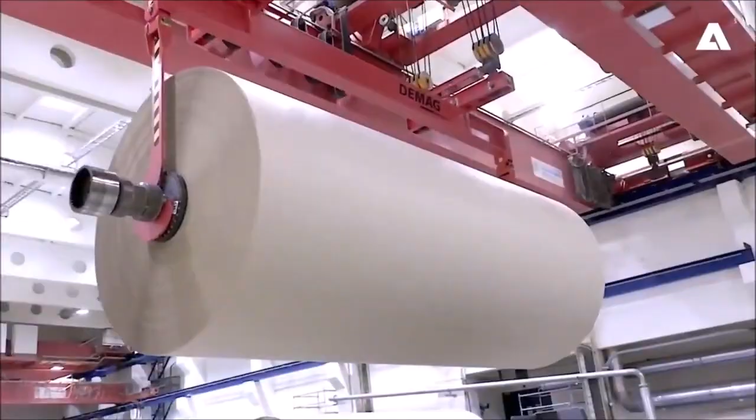We at ANDRITZ Paper and Board drive your success through cost-efficient innovations, and we form sustainable relationships. From stock preparation to the reel, including fabrics and rolls, automation, pumps and services, we deliver solutions for complete lines.

We are experts in rebuilds and conversions, including project management, engineering, auxiliaries, electrification and control systems, startup assistance, training and after-sales service. Our mission is to create value in two ways: by improving the value of your mill's production operations and by adding value in the way we work together with you.

Our service specialists help protect and extend the life of your equipment from virtually any OEM and lower your overall operating costs. Let's foresee digitally with Metris. Risk-based management, remote assistance and real-time support are only some of the key benefits. In addition, we offer innovative traditional automation solution packages such as hardware-independent control systems.

Cost-efficient innovations for paper and board production. Our customers worldwide rely on us. Expertise, know-how and innovation. This is what we at ANDRITZ Paper and Board stand for.

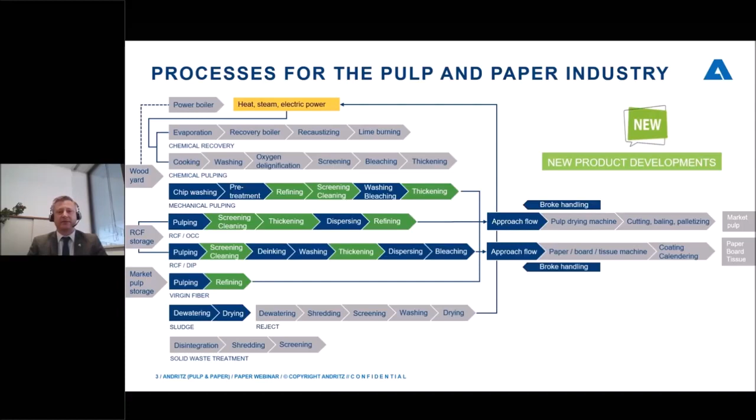I'm here to give a short presentation about the latest developments in fiber preparation. My presentation is divided into 6 parts and I will start with a short overview. As you might know, ANDRITZ covers the complete process for the pulp and paper industry. Today I want to focus on the newest product developments related to mechanical pulping, recycling fiber and virgin fiber applications. My plan for the next couple of minutes is to introduce the latest prime technology for screening, thickening, cleaning and refining applications.

Let us start with some details concerning the new Prime Screen X. The main parts I want to introduce are the top feed system, the prime rotor and foils, and the optimized basket's height-to-diameter ratio. These features lead to minimized wear, increased efficiency, and lower power consumption.

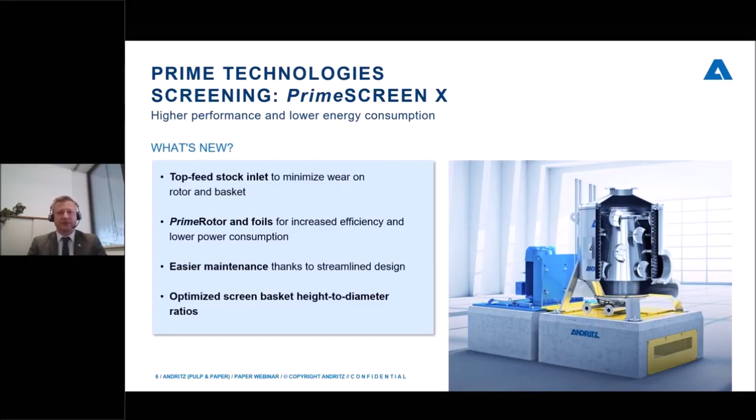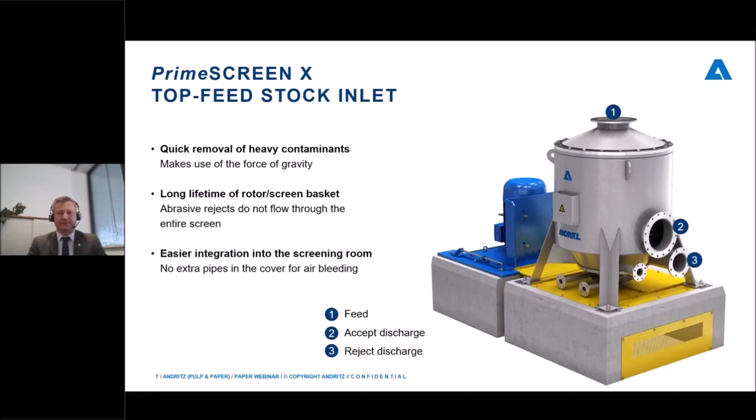The pulp suspension is fed under pressure to the top part of the screen. Due to this design, we can achieve a quick removal of heavy contaminants and longer lifetime of the rotor and the basket. As well, there is no need for any additional deaeration pipes anymore. In addition, the streamlined rotor attachment and the clamped screen basket design reduces the maintenance and replacement work compared with conventional pressure screens.

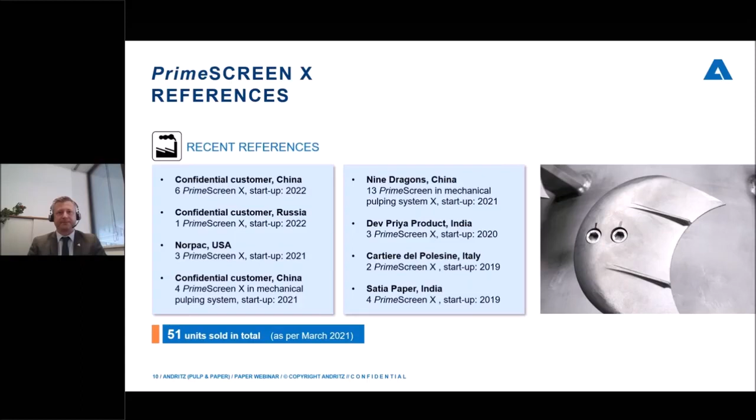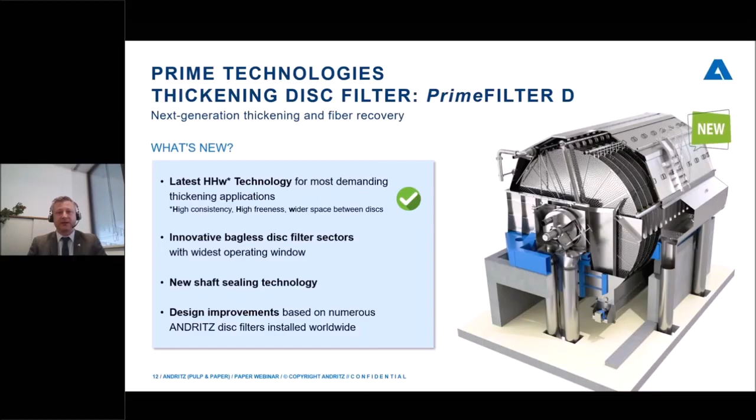The next ANDRITZ generation of thickener and fiber recovery filters will be the Prime Filter D. Within this filter, we have combined our latest high consistency and high freeness technology, as well as our innovative bagless disc filter sectors. This filter perfectly suits all kinds of thickening and fiber recovery applications for recycled fiber, virgin fiber, and mechanical pulp applications. For thickening applications, it goes under the product name Prime Filter DT, DS for Save All applications.

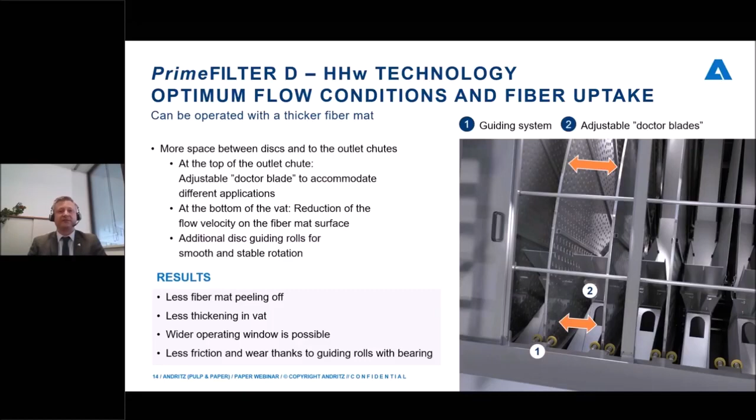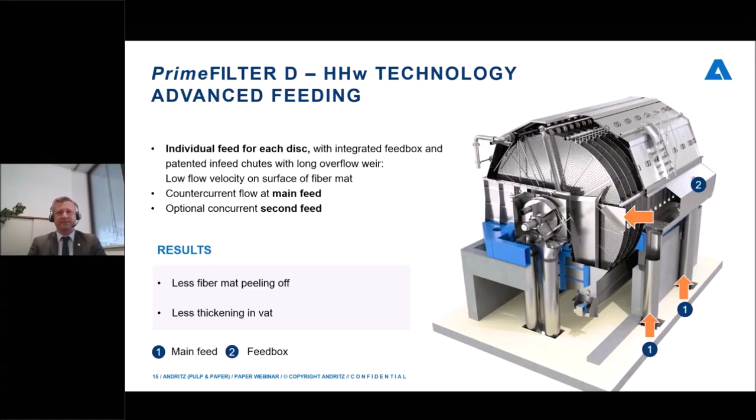Using the already mentioned HHw technology and the wider distance between the discs and the outlet chutes, this filter can be operated with a thicker fiber mat than usually. Due to the features mentioned before and the individual feed for each disc, we can assure less fiber mat peeling off and less thickening in the vat. The bagless sector design combined with the HHw technology has a 5% increased disc area. Furthermore, no additional filter bags are needed anymore.

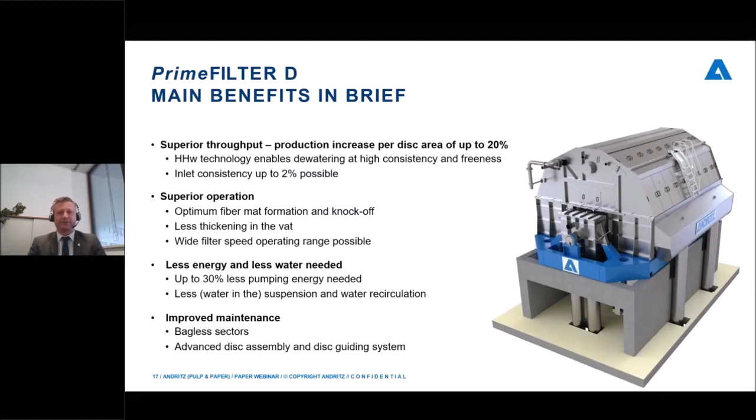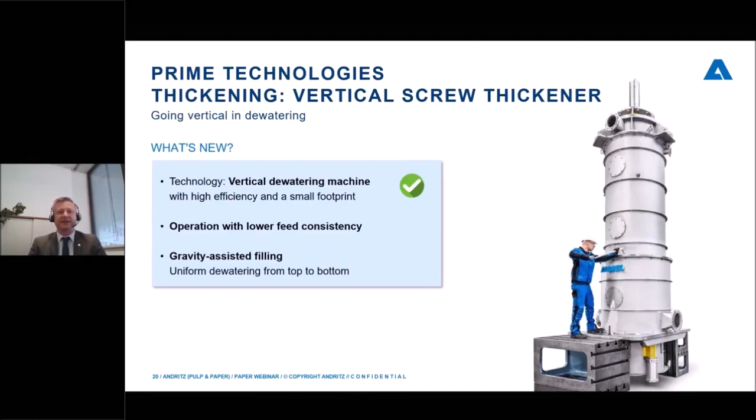The vertical screw thickener, simply described, is a vertical configuration of our well-proven horizontal screw press technology. This allows the equipment to run at lower feed consistency. In addition, the filling is assisted by gravity. The overall machine concept ensures complete filled screw flights and provides additional dewatering forces. We achieve a very even dewatering due to maximized dewatering area and dewatering forces.

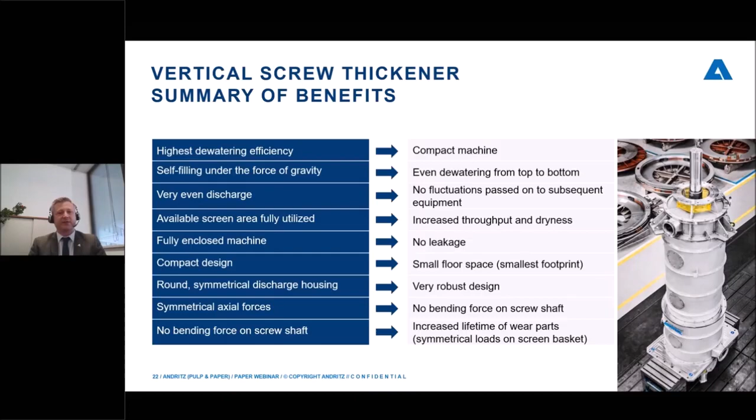Summarized, even at low feed consistency, a high outlet consistency can be achieved, considering equipment with a compact machine design and a very small footprint. Also, this is one of our latest innovations. We have already sold 7 units in total.

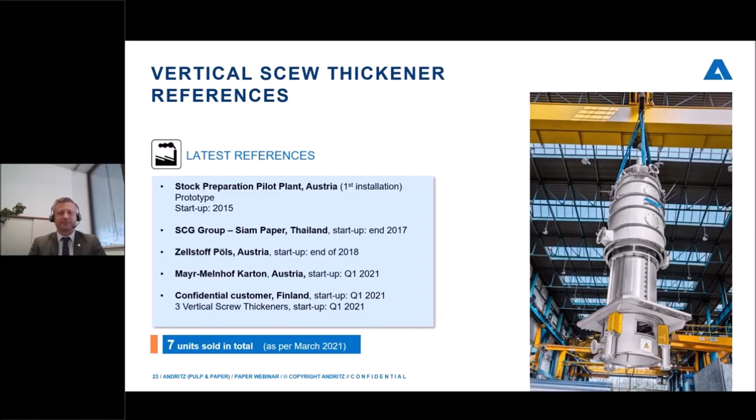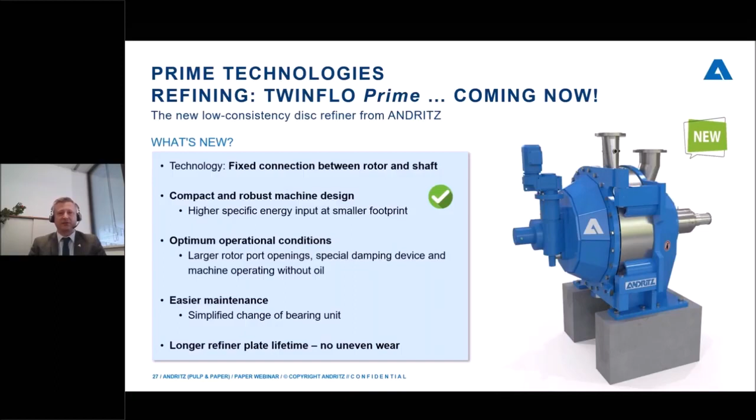Last but not least, I'm very happy to inform you that by today, ANDRITZ has released a completely new product: the TwinFlo Prime. This new low consistency refiner features a compact design, optimum operation conditions, and easier maintenance. Let's have a look at the following video to introduce the brand new TwinFlo Prime.

Welcome everyone. My name is Thomas Reisinger, and I am the Director of Mechanical Design for fiber preparation products in the ANDRITZ Paper, Fiber and Recycling division. Today, I would like to introduce a brand new development in the low consistency refining sector. Here we are in the M4 production shop at our manufacturing location in Graz, also the site of the ANDRITZ Group's head office.

My colleague Nick Heckfish is responsible for the assembly of LC refiners and has prepared this new model so that I can tell you all about the technological innovations, the background and the advantages of this brand new development. Behind me is not only my personal pride and joy, but also the pride and joy of the ANDRITZ development team, our new TwinFlo Prime Disc Refiner.

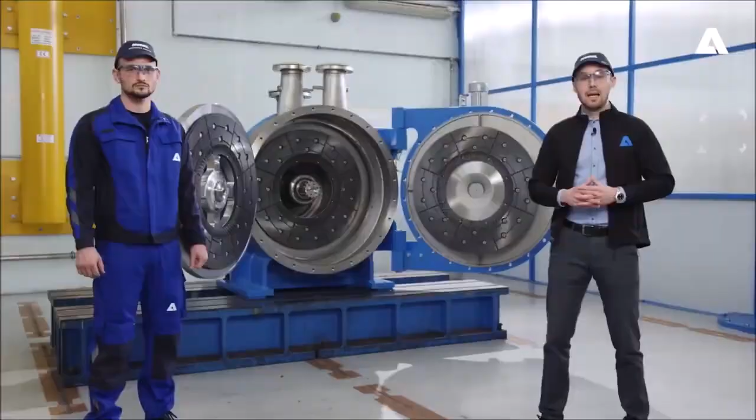So, let's get down to business. ANDRITZ has been involved in fiber preparation for many years now, and we have already started up more than 2,000 LC refining plants successfully all over the world. That's why we definitely wanted to stick with the basic principles of the TwinFlo refiner. By this, I mean a disc refiner with 2 refining zones, a cantilevered refiner shaft and diverse refiner plate designs in order to accommodate the different pulp properties to the best advantage.

What distinguishes the TwinFlo Prime from previous refiner models? In a nutshell, concentrated performance in a very compact design. In other words, the new TwinFlo Prime enhances the energy input, improves maintenance, and increases refiner plate lifetime. How do we do this? I'll show you this directly at the new TwinFlo Prime.

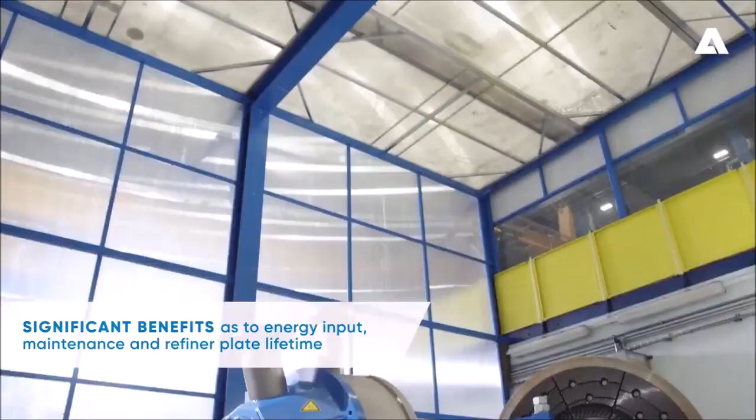We can now see the TwinFlo Prime in the open position. The first impression of the machine shows right away that the overall length has been reduced significantly. The inlet and outlet pipes are in the usual places, but the process area of the machine has been optimized in terms of fluid dynamics.

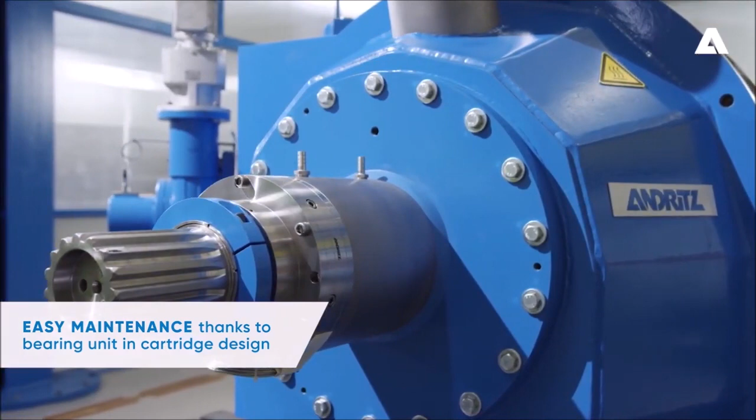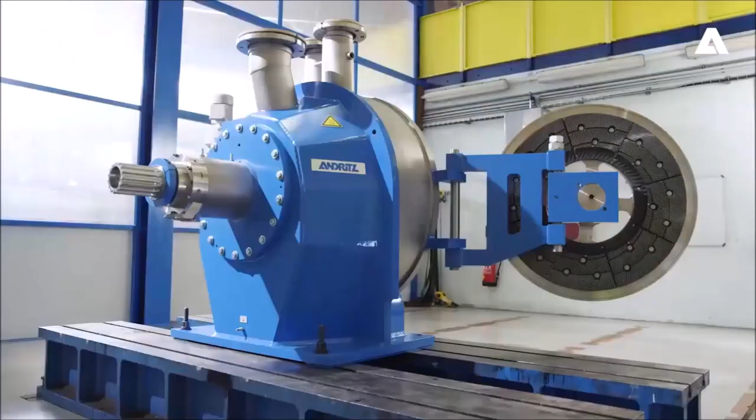The bearing unit of the TwinFlo Prime has a cartridge design and enables easy maintenance in this area. In this case, the rotating unit can be changed, complete with bearings and seals, without having to lift the TwinFlo Prime or its drive unit out of the foundations. In the standard model, the TwinFlo Prime comes with a mechanical seal, and this also has a cartridge design. The rapid changing system for the refiner plates in the TwinFlo Prime is the system that is well known from previous Twin Flow refiners.

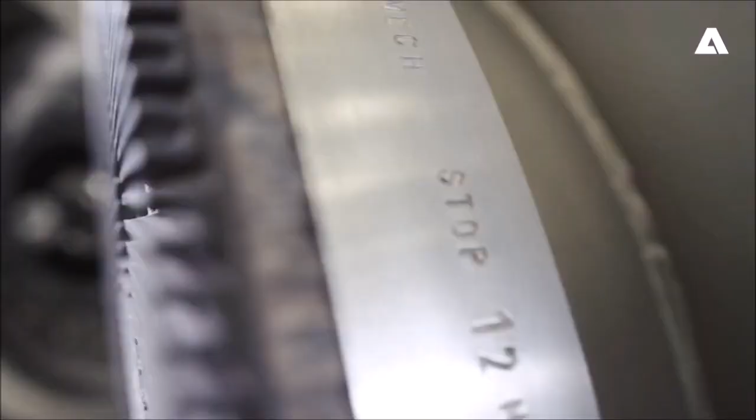In order to adjust the refiner gap of the TwinFlo Prime, one stator refining disc is adjusted, one remains in place, and the rotor refining disc with refiner plates on either side adjusts itself automatically so as to be axially centered between the two stator refining discs, a principle that we already know from previous Twin Flow refiners. Nevertheless, there is a significant innovation here. It is the way in which the rotor refining disc aligns itself centrally between the two stator refining discs.

So far, the rotor refining disc in the TwinFlo refiner was able to float freely in axial direction on the fixed refiner shaft, on a sliding hub, in the machine's process area. In the TwinFlo Prime refiner, the rotor refining disc has a fixed connection to the refiner shaft, and both components move together in axial direction. Axial position compensation between the fixed drive unit and the moving refiner shaft takes place in the coupling between the two units. As a result, there is no longer anything to impede axial movement by the rotor refining disc.

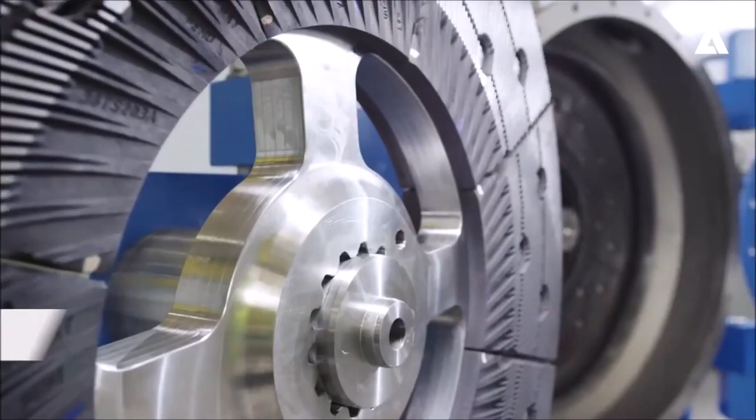Furthermore, the port openings in the rotor refining disc have been enlarged by 70% in the TwinFlo Prime compared to previous Twin Flow models. This improves the flow to the two refining zones, evens out the input of refining energy to the two refining zones, and prevents one-sided wear on the refiner plates. No uneven wear on refiner plates. Refiner experts know this is one of the keys to longer plate lifetime.

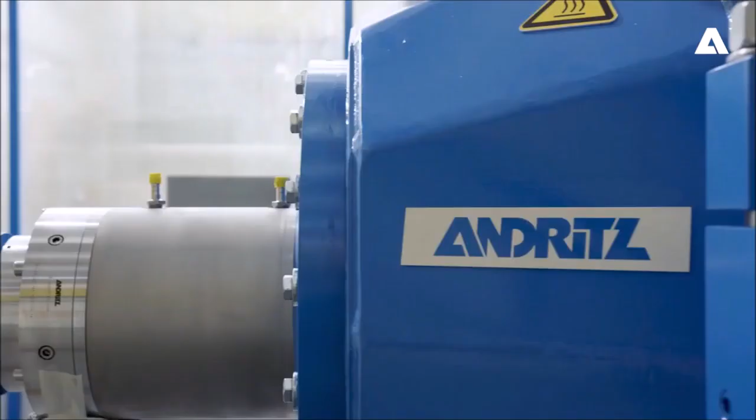And now, how do we manage to build such a compact TwinFlo refiner? How can we ensure that the rotor refining disc, including the refiner shaft, can float freely in axial direction? Two questions, one answer. A hydrodynamic, water-lubricated plain bearing. In this fascinating bearing technology, the shaft is supported on a thin film of water. By using this bearing technology, which has been known for a long time in turbine engineering, we can gain numerous benefits in the TwinFlo Prime.

For example, we can reduce the overall length of the TwinFlo Prime by 30% compared to previous Twin Flow models. This increases the machine stiffness significantly. As a result, we can achieve 25% more energy input. Furthermore, the TwinFlo Prime refiner operates without oil. The sealing water that is always needed serves at the same time as working fluid for the bearing. Another innovation in the TwinFlo Prime refiner is the viscous damping unit. It reliably prevents abrupt movements by the rotor refining disc and also operates with water.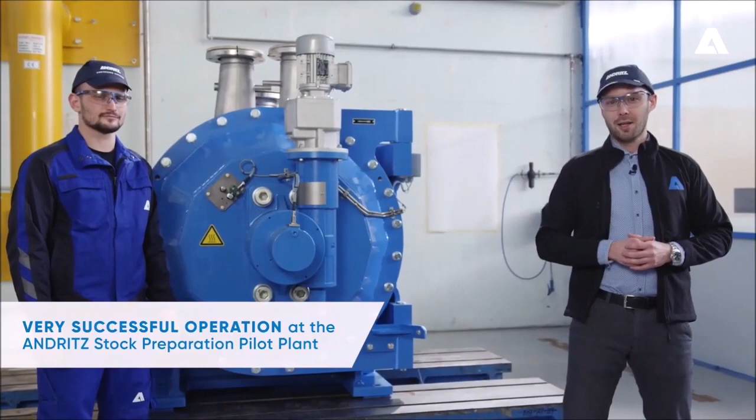I'm sure you want to know what operating results the Twin Flow Prime can achieve in practice. Since November 2019, the 20-inch Twin Flow Prime has been operating successfully in the ANDRITZ stock preparation pilot plant, and it was able to fully meet the high expectations placed on it. Now we have reached the end of our product presentation. I hope I have succeeded in providing you with a good picture of our new and innovative Twin Flow Prime.

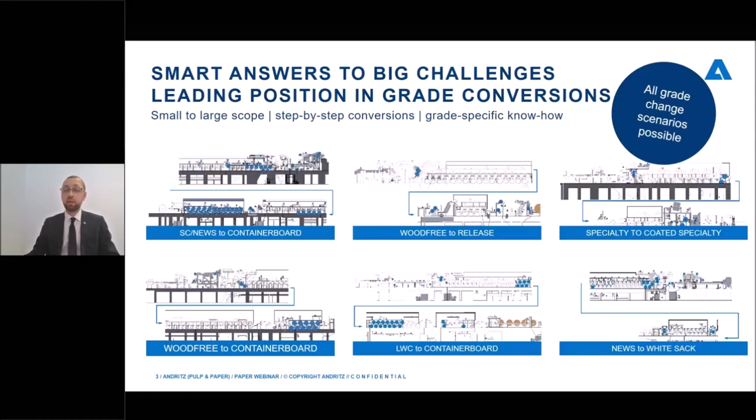Of course, all of this is possible today, but out of these jobs and this experience, we learned that sometimes there is a possibility to really deliver a big impact with rather limited effort, cost, and time. And today we will present you these parts. So basically, we will focus today on the headbox area, the forming section area, the rebuild of the press section area, and drying and finishing. And we will try to present in a short time what could really be the smart answers and what partial things you could do in a rather quick time to improve the situation.

First part, I have some problem with the presentation. I hope it will be solved.

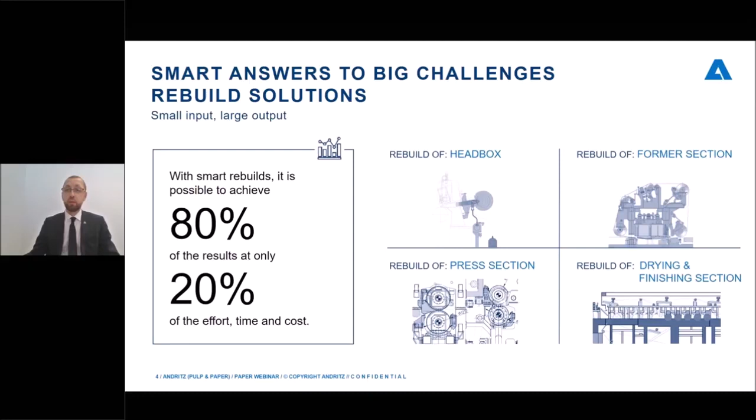Yes, the first part I'm going to present is the PrimeFlow AT headbox, and now in the picture you see the trapezoid accelerating tube bank, which provides a unique and superior flow uniformity. And what can we do with this? The first thing I would like to present to you today is called soft layering. What is it?

You can see in the picture the headbox, where you can see two layers, one in red color and one in green color. You can see a dilution in light blue, and you can recognize that there is some other kind of dilution control in the yellow color, and this is exactly soft layering. So what can you do with this? Actually, the system looks like a dilution control, so it's very similar and very simple in terms of realization of this system.

And you can bring different additives, either fiber, chemicals, filler, or fines in between the layers, but you can also bring it on the top and on the bottom. So basically, we dedicate a layer and we prepare a headbox for the system. And what is important is that any PrimeFlow AT can be equipped with the system either from the beginning or later on after a certain period of time in operation. So this is a unique system on the market, and ANDRITZ is the only company who can supply it.

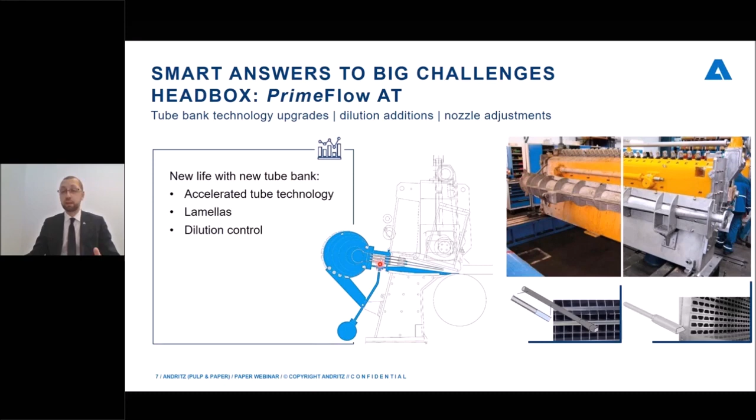We are coming to the forming section, and I would start from the shoe blade gap former and also a bit from the history. So ANDRITZ patented this solid ceramic shoe in 2000, and there was a development history, then it was implemented in fine paper, then the first containerboard installation came online in 2012. Then we continued to develop it. Then we achieved another important milestone, to produce on a vertical gap former the grade 250 grams per square meter. And then the latest references.

This is a vertical gap former, which is shown in this picture. It's actually the fastest kraftliner gap former worldwide, which has a design speed of 1400 meters and a wire width of 9.2. This machine shows excellent performance, and now it produces more than 80 tons per hour with perfect quality. And you will ask, what is the practical use of this? What can you do with this? So basically, we see three different fields where it's really beneficial to have it.

Of course, if we talk about a new installation, the shoe blade gap former could provide a very small footprint with uncompromised quality. But we talk today about smart answers. So what can you do with your existing gap former? Basically, with our solution, we can keep the mechanical installation as it is, so framework, rolls, etc. would stay the same. We would just implement the shoe blade gap forming technology in the forming area. And with this, you have two opportunities.

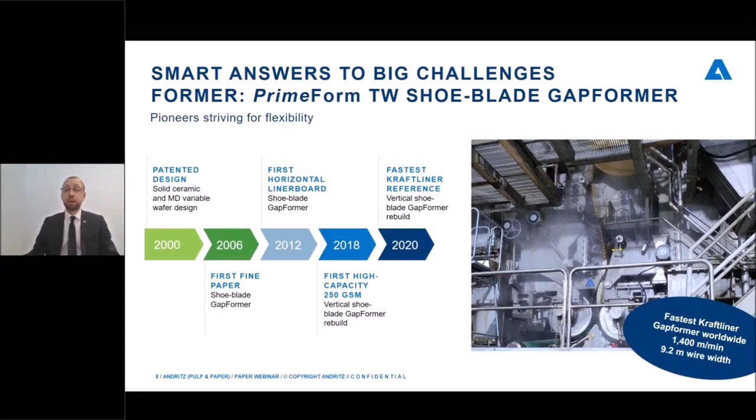The same philosophy we implement in the hybrid formers, and you can see here in the picture an example of this rebuild. So we can easily upgrade the hybrid former from straight-through to a high capacity and low intensity hybrid former. And you can see in light blue the parts that are added. So a curved hybrid former and the two dewatering boxes. So basically, with the existing installation, just inserting some elements, you completely change the area of operation of the hybrid former.

So what is the benefit of this? The benefit is you could really decrease the inlet consistency in a range of 1.2%, improve the formation, improve the quality, and of course increase the headbox flow. I would show you some reference cases.

Igor, can you hear me? Yes, I can hear you. Okay, now we will try to fix the problem immediately. So please stay on the line, keep your camera turned on and your microphone on, and we will try to show your presentation again in full screen mode.

Thank you, Elizabeth. So what we can see now is the slide about the hybrid former.

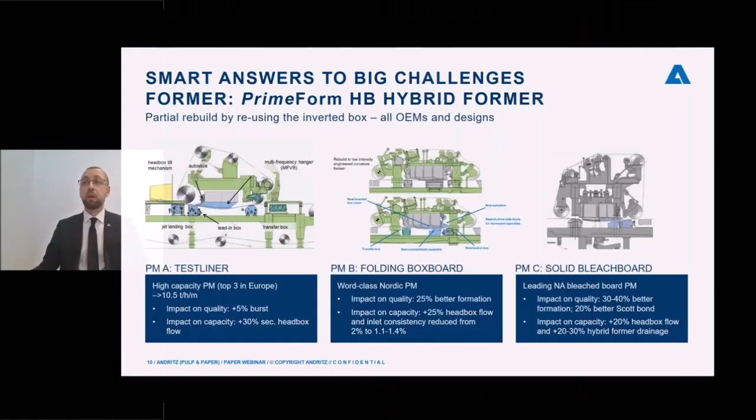This is great news. So we see your camera in full screen mode. Good. Just to come to the necessary slide. And okay. Now I hope you could start to see the slides already. Yes, we see the slide of the hybrid former about partial rebuild by reusing the inverted box. You should see the slide with the 3 showcases. Yes, correct. Exactly. So, ladies and gentlemen, sorry for a bit of a technical problem.

We stopped on showing showcases, and I would like to show you 3. I will introduce the impact on quality and impact on capacity in these showcases. All these 3 are partial hybrid former rebuilds. You can see in light blue what was done. First, reference A is a test liner machine. It's a high capacity test liner machine, running more than 10.5 tons per hour per meter.

In this rebuild, we increased the burst by 5% and increased by 30% the flow of the secondary head box, which is installed in front of the hybrid former. In reference B, which is folding box board, we could improve the formation by 25% and increase by 25% the head box flow, with, as you surely remember, lowering the consistency from 2 to 1.1, 1.4%.

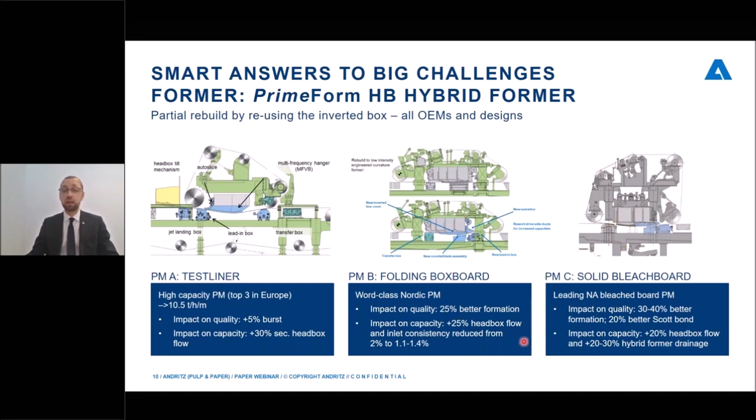The next reference I would like to show you is in the press section, and I'm proud to present it for the first time to a wide audience. It's our record in terms of line load shoe press, installed at Cartiera di Laveno, located in Italy. We have a long, successful relationship with this customer, have made many projects together, and have good trust between us. In this company, we installed the world record shoe press, which gives a nip load of 2000 kilonewton per meter.

With this nip load, the customer could achieve a dryness of 59%. Of course, you can estimate that this has a very big impact on efficiency, especially energy efficiency, and also on production capacity. We were also looking at the daily operation of this machine, and we can confirm now that the felt lifetime is unchanged after the rebuild. I think it's very important that we as ANDRITZ have both the machinery and the machine clothing, so we can see the full picture.

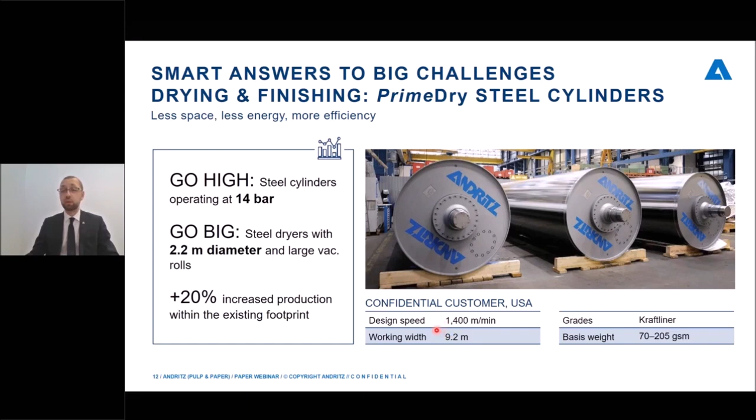Of course, finishing and calendaring is very important for us, and we still develop it. And where are we focused today? We focus today on high flexibility, on different applications, so we can really go with different paper grades and implement it in release, barrier coating, some special coating.

But what else do we do? To shorten the shutdown time and the installation time, we were focused last year on a compact design and to build the whole system into the machine. So basically the whole system, like hydraulic, pneumatic control, is already pre-assembled and delivered with the machine. And I would like to show you some more details about the curtain coater.

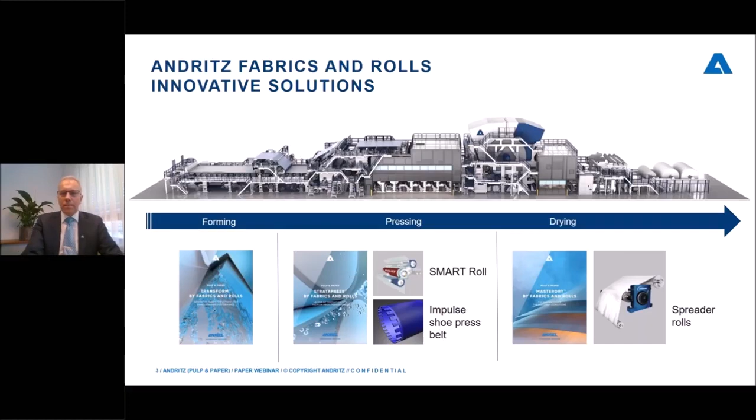Looking first into forming fabrics. Forming fabrics have certain demands, as you all know well. First of all, we don't want to see any marking on the paper. Paper formation, fiber retention, and drainage should be just perfect. Dimensional stability is quite essential to achieve a good running time, and fabric life plays an essential role as well.

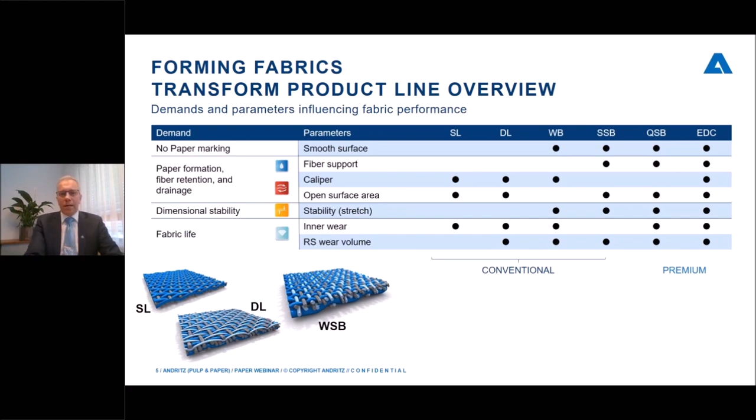ANDRITZ Fabrics and Rolls can offer the most complete product line to the market, starting with single layers, double layers, warp support binders, which have less internal wear because of their special binding structure. Those kinds of fabrics are not available from all competitors in the market, so I'm explaining this a little bit more with an example later. Then we have SSB, today's standard in the market. Most of it is no longer patented, so I would say state of the art, used in most applications.

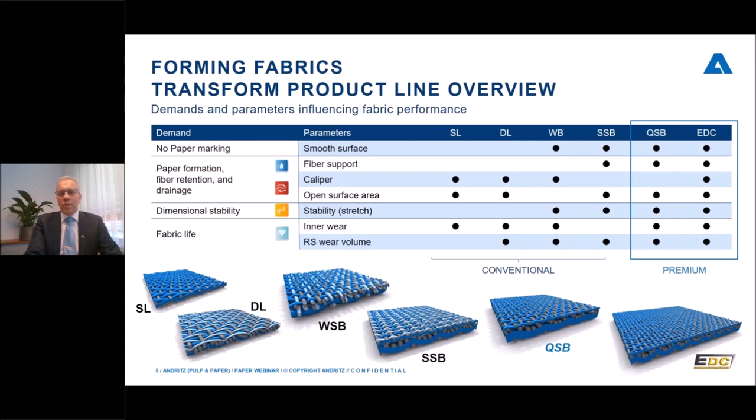And I'm going to introduce you to new patented designs, QSB, Quattro Support Binder, and EDC, Engineered Drainage Channel, which offers value. So in the following information, I'm going more on the premium segment. Starting with EDC, Engineered Drainage Channel, it's a patented warp system with CD-oriented paper side. It's a very low caliper design, which we have, and it is good for fast initial dewatering.

Potential lifetime increase due to warp-bound EDC designs is something which was driving us. So therefore, we came up here with this new design you see on the left side. It's a 3/5 binding, which we have here, a little bit different to the conventional EDC we have with the 2/3 binding, which you see here on the right side.

On the right side, further on, it's a 10% reduced caliper and an improvement of the void volume, which you can expect here. You see that here in an example with a 25/16/30 to a 26/26/36 EDC. It's about 20% less void volume inside of the fabric. Obviously good for high initial dewatering, but also in order to keep the machine clean when operating.

The potential lifetime increase which comes with this design is obviously a second advantage. You see it if you just look at the picture, that also the surface for the paper is an essential improvement which we did.

Coming here to a first example, it's a roll blade former, a 1550 meter machine producing fluting, 75 to 150 GSM, 100% waste. Our objective here was to improve runnability and performance; the action, replacement of a standard SSB with an EDC forming fabric design. Both chambers of the HV1 we could switch off, maintaining dryness of approximately 22%. And what is also quite interesting, we had this 22% directly on the first day, which normally occurs after the second day.

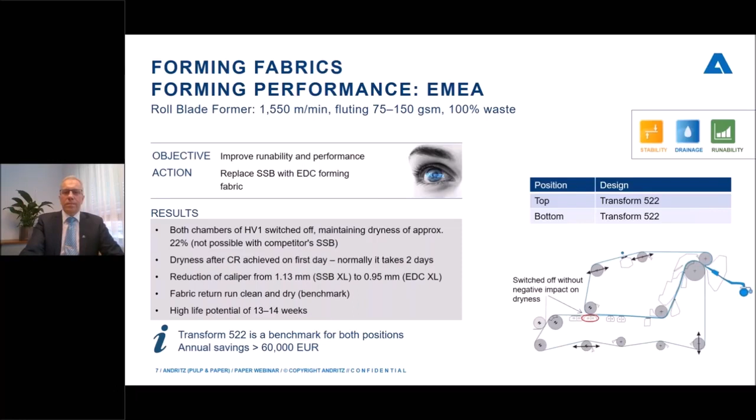Our next important point of our family here is QSB, Quattro Support Binder technology. It's again an improvement from the SSB towards this patented and standalone design. Same as with the EDC, we have value added in mind here, and it's used for medium caliper designs, but also coarse designs. The improved layer binding avoids internal wear, and you see that the stitching points, if you look at the pictures, are in the QSB about double what you have in the standard SSB design.

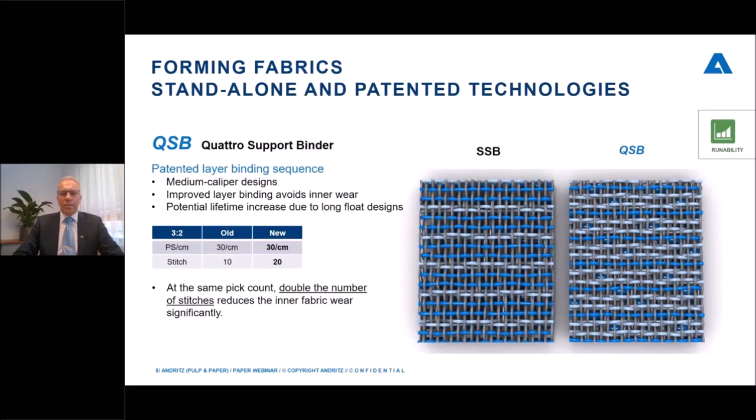Also here an example, replacing a warp bound design with a QSB in order to improve the machine runnability. We had here an increase of the lifetime from formerly 60 to 80 days to 120 days, which is a significant improvement. And the warp bound top fabric was also running with a very good potential due to its cross stability, of 100 days. Annual savings we generated here were 70,000 euros.

Another interesting example here with a hybrid former machine running at 750 meters a minute, producing liner, white top liner and corrugated medium. And you have here, as you see, the improvement of the runnability, which we had in mind. They operated already here with the drive load at 100%, and the usage of a warp bound structure, including E-line energy saving yarn materials, we had in mind in order to improve the situation.

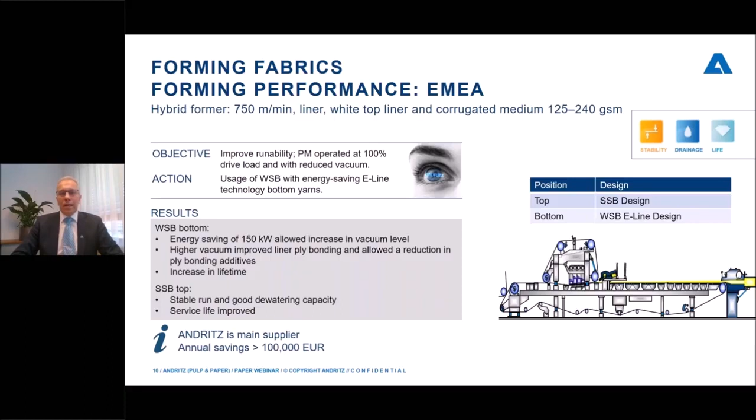What we achieved here is the energy saving of 150 kilowatts, which allowed us to increase the vacuum levels, which had been reduced because of the drive load missing. Higher vacuum improved the liner ply bonding and allowed us a reduction of the ply bond additives. And the increase of the lifetime was just a further surplus which we gained here. The SSB top ran at the same time stable and without any big trouble. And we generated on that machine savings of more than 100,000 euros, which have been confirmed by the customer.

Press performance. Also here quite important, you see that on the video, laminate and also single layer press felts. We are using and pushing more in the direction of the single layer fabrics due to obvious advantages. First, you have this moire effect, which you see here with the laminate. Second, you see also that the dewatering is going here without any disturbances.

We are adding to our press felt designs here certain add-ons and technology like the QS technology. Here we are talking about twisted material, twisted yarns, which we have. These twisted yarns we are manufacturing here in our Gloggnitz facility, which is the biggest European press felt manufacturing site that is in the market.

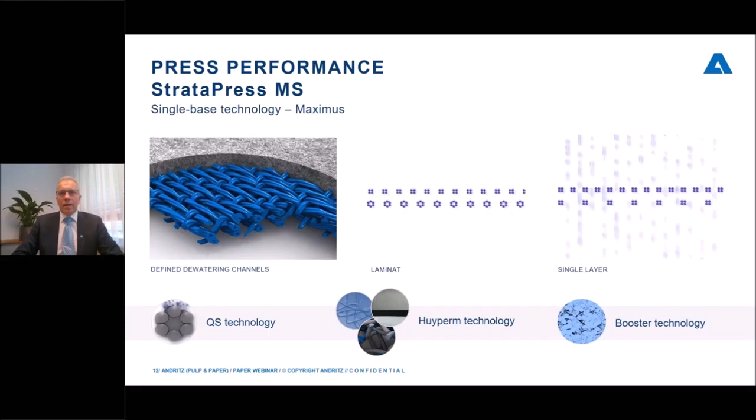If you look here to the middle point, you see the Huyperm technology. It is something which is ensuring us a very smooth surface design of the press felt, and therefore also here quite essential for paper quality. Last but not least, the booster technology to the right is good for a fast startup of the press felt and to get the desired results.

Coming a little bit more into detail about StrataPress SX, it's again a patented and standalone technology which we have. It is a seam felt design, as you can see, and it has a middle layer of plied yarn, seam loop forming the top and the bottom, and the CMD monofilament for best stability. The MD monofilament on top and bottom side of the triple layer is a construction for the loop formation, and the MD middle layer consisting of plied monofilament is improving the batt fiber anchorage.

On the right side, you see two pictures. The first one on the top shows you that we have here the pin seam in, and what is quite important, it is so tightly embedded in that you have almost no visible marking on the paper. This is also after 10,000 cycles of using it. You see also here that we have even so no marking problematic on the paper side. So therefore it can be used on all paper and packaging grades which we have here to offer.

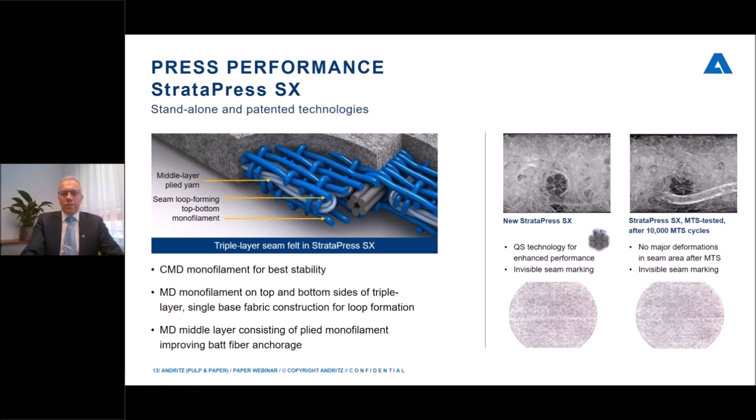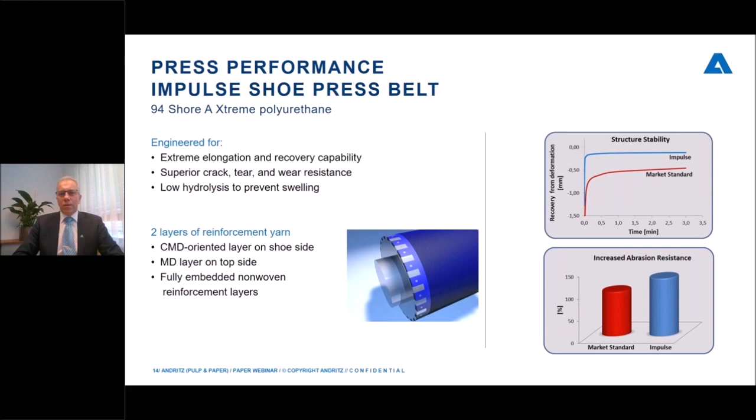Further, you look here into impulse shoe press belt technology, which is quite important for the case study I'm showing to you in a minute. It is the new polyurethane technology that we put together, and it has all kinds of surface designs which are here available, from blind drilled and grooved, only grooved, interrupted grooved, and it is a standalone material which we are using here as well, which offers here a superior crack resistance.

Looking here into the case study, you see here a shoe press with 350 to 580 meters a minute, producing board in the range of 220 to 400 GSM. And we had here the objective to eliminate the nip flooding and delamination and blister problems in second press position. We use our Rezolve program, which allows us to model the press situation. You put in here the data regarding the paper. We have in also regarding felts and also rolls or shoe press belt surfaces, like here in this case.

We consider the best possible combination of the felt design and also the shoe press venting, and the introduction of the impulse shoe press belt in blind drilled and groove design was what we finally went for. The Rezolve calculation shows double layer seam felt with 1800 GSM, which we could finally use, and we could go a step backwards from the formerly used triple layer design in 1950 GSM, an obvious additional saving which we achieved.

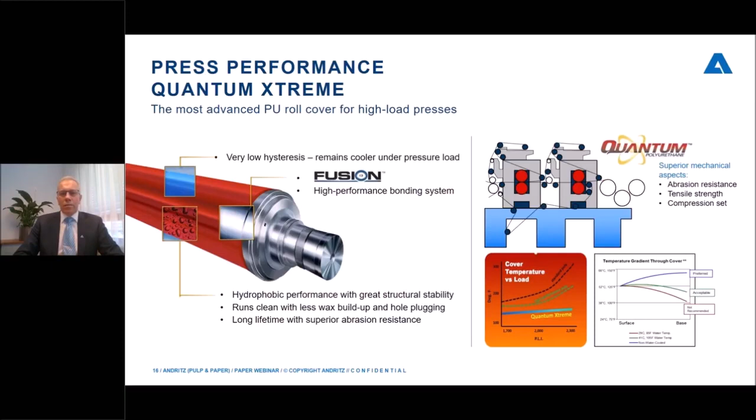Further, there's not only shoe presses in the market, but we have also heavy-duty presses still. And here we have a new technology in the polyurethane area, Quantum Extreme, which has a very low hysteresis. It remains cooler under pressure load, and the special fusion high performance bonding system allows that we can operate this kind of cover technology even without cooling of a roll, which is an essential benefit and saving for a customer.

Also here, an example. We had here the objective to improve the dewatering in a press section and increase here from 46 to 47%. We consider the press felt, the roll cover, and also the venting design. And here with the Rezolve calculation, which we did upfront for the first and second press, we consider then a blind drilled and groove design, which is something which we can do with this kind of polyurethane technology, however, not with a conventional rubber cover, which is used here in this kind of applications usually.

The StrataPress SX felt design, which we used here on 1800 GSM, was in operation as well. Reduction of Uhle box vacuum and increase of nip dewatering was an advantage which we gained here and wanted to have too. Results: roll cover service interval for blind drilled rubber covers improved with the Quantum PU from 10 months to 18 months, which is a significant improvement.

And let me add here also, after 3 to 4 times you have to recover a rubber cover. That is not the case here for this Quantum PU cover which we used. We were able to shut off and disassemble the roll cooling system, and the StrataPress seam felt saturation optimized by fan shower adjustments was also something which we could achieve. Improved dryness by 1.3%, annual savings about 95,000 euros.

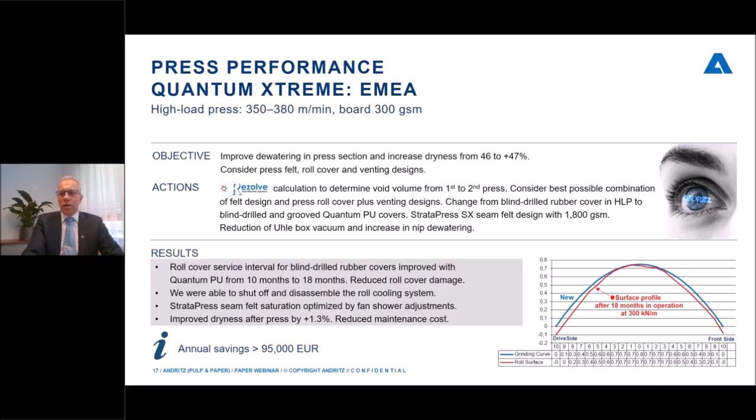Drying fabrics. It's the latest innovation which we brought into the market under the product name Masterdry. Large contact area here with less contamination options on the surface, a single layer fabric design for easy cleaning, a rectangular yarn for high wear resistance, and an open fabric structure, which is again easy to keep clean.

Also here a case of a single run group machine, faster than 1500 meters per minute. It's packaging papers, lightweight packaging, 70 to 120 GSM. The objective was to improve running time. And what we achieved with Masterdry is 90 days running time. It's a plus of 20 days compared to what the customer achieved before.

The roll side wear profile is still at a moderate level, and the quite clean surface, as you can see in the picture, reduced the risk of paper sheet breaks. So annual savings due to longer running time and the reduced risk of sheet breaks is an obvious advantage which we gained here.

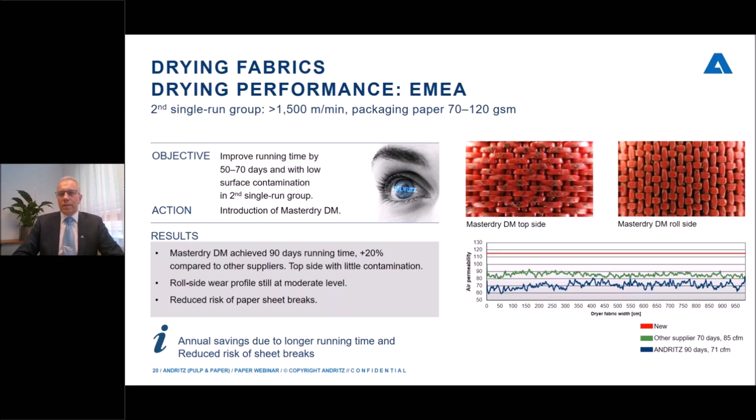In the last chapter, I would like to introduce some important family members of our products, which are smart. Smart technology innovations in terms of spreader rolls are quite an obvious advantage because spreader rolls are used in all kinds of positions on a paper machine. If you have that under safe control, you don't need to worry about your machine's operational time and efficiency. If not, it can mean quite some additional effort for a big machine. We therefore came up with X-Life LS spreader rolls.

They have the option inside the roll that you grease or put a drop of oil to each bearing, maintaining the original grease as it had been before, and therefore you can prolong the lifetime significantly. So the extended warranty which we can give, 24 months after installation, latest 36 months after shipment, is an advantage over conventional rolls with 12-18 months.

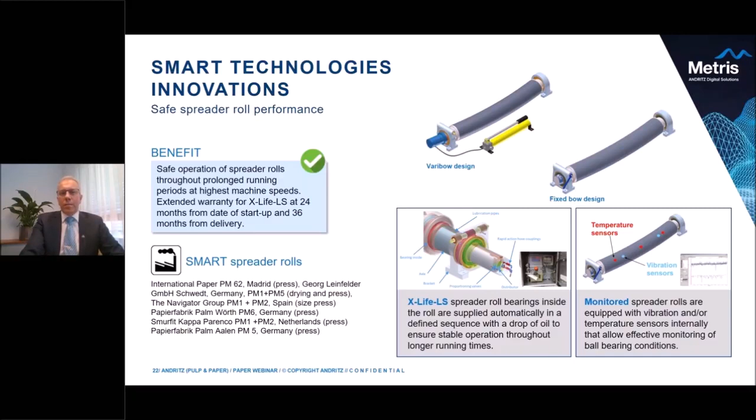On the right side, you see monitoring options with the spreader rolls, where we can insert temperature sensors and also vibration sensors. Both in combination are an advantage to predict early enough if there is any trouble coming up in a spreader roll. And you can also have that on professional software that indicates ball bearing damage before you even know it.

It includes sensor technology, which is measuring real-time nip conditions affecting paper sheet quality and the machine performance. We have been doing that on shoe presses, on conventional presses, on size presses, of any kind. And the advantage you gain is not only to see the profile of the roll, you can also directly adjust if there is anything not adjusted to the right position, and that before a roll cover shows a damage.

So stay tuned. It was a pleasure for me to focus here with you on this smart technology, and I'm now ready to take any questions if there are.

Stefan, thank you very much for these great presentations. While you were speaking, quite a couple of questions came in, and here is the first one for you. Resolve is now getting smart. What does this mean? Yeah, thank you for that question. It's quite an important question you have here.

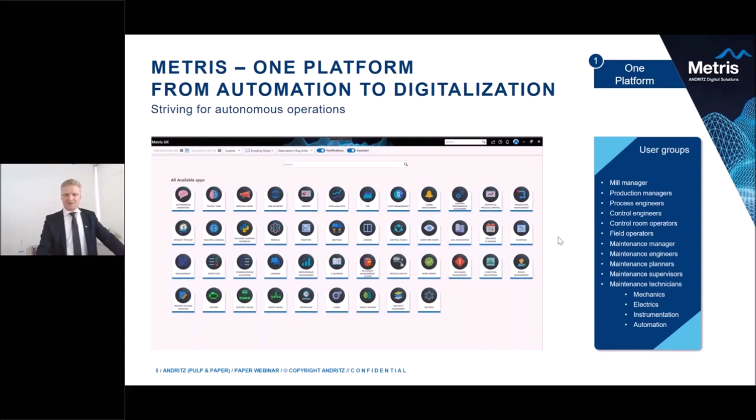So starting with our ANDRITZ DCS, I mentioned it in the history. We started quite early with deploying third-party systems quite successfully in the industry with a huge list of references. And with the demand of combining automation and digitalization, we decided to develop our own DCS based on the experience that we gained with all those system integrations. So we took the best out of the systems that are established in the market and put it into one system together.

So Metris X is an HPC-based distributed control system with all functionalities that existing market systems have, but also of course with some special benefits and some things that differentiate us from the big DCS suppliers that are well known in the market. So we are really flexible because our system is hardware vendor independent.

What does that mean? So if you already have a certain preference on your hardware, which typically exists because each mill has a certain history, that can be reflected with our system: you use the hardware of your preferred supplier, and on top comes our DCS system. Or even if you have an island with a quite new I/O system, you can reuse that, and this ensures maximum flexibility.

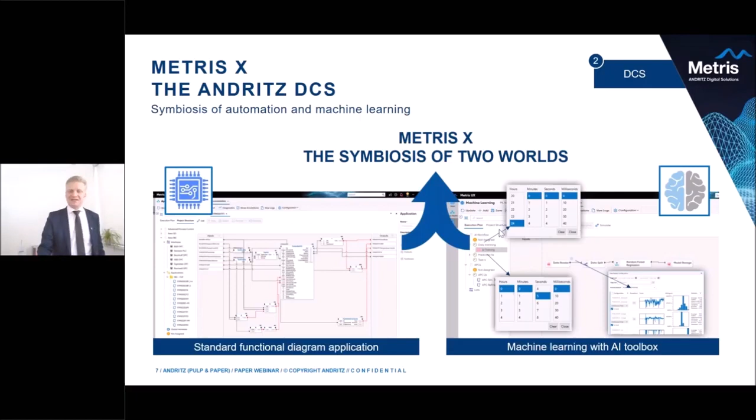So these AI tools are intuitive in such a way that the automation engineer, with the target given by production managers and technologists, can simply integrate AI-based models in the DCS directly. I brought one case example that makes it a little bit more tangible. So let's think about a continuous freeness control. There is already an advanced refiner control in place. So we see here the inline freeness measurement with an analytical tool that delivers a value every 20 minutes.

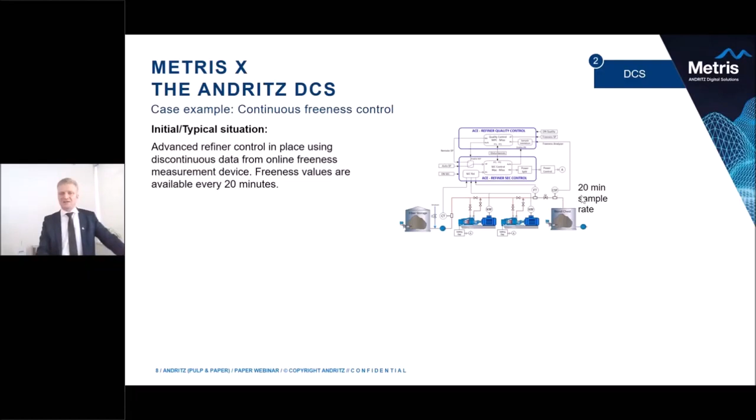And what is now the benefit with these AI embedded functionalities? So we have that in one surface, in one system, and by adding process data and lab data together with the data from the freeness analyzer, we can simply develop in the DCS environment a freeness model that will later on give a signal into the process control, and this 20 minutes delay will be eliminated, and we have a continuous control.

So we all know that within 20 minutes the furnish and the process conditions can totally change, and if we are not bridging those 20 minutes, we could have quite different fiber properties in the end. So our solution delivers a better furnish quality due to a precise control in between. Of course, in the end, you will then get an optimized energy consumption for the defined fiber properties.

And what is also nice is that there is an automated remodeling functionality embedded, which can be adjusted to the demand of the control on an hourly, daily, or weekly basis. So there is no additional work to be done for this. And everything we are doing is in one single engineering environment. So now let's come to the next topic, maintenance. We have a really fancy application for maintenance.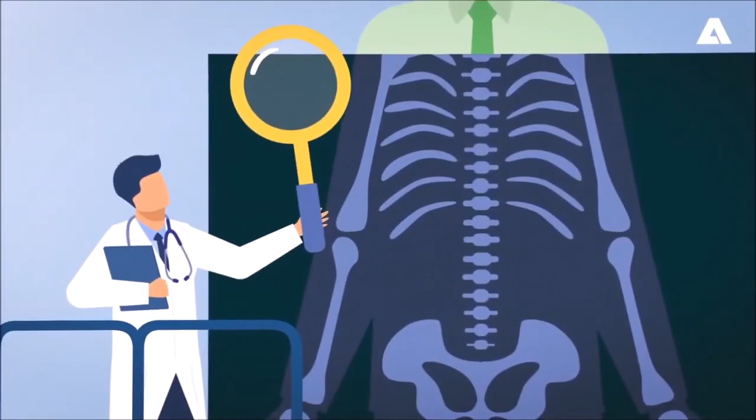What if you could have an all-in-one doctor who has full knowledge about every specialty of human body science? And more, what if this doctor could summarize and weigh all relevant details from every cell of your body immediately? This doctor would evaluate the data and take preventive actions before any disease shows up. This is not possible yet for our body, but is a reality for industrial mills.

Metris risk-based management identifies the overall risks up front, proposing the right tasks for fixing and therefore avoiding unnecessary interruptions. Professional asset performance management is a challenging process and a complex interaction of various disciplines in order to avoid unplanned shutdowns, which might cause losing millions of dollars per day. The overall risk is typically calculated as impact multiplied by its probability.

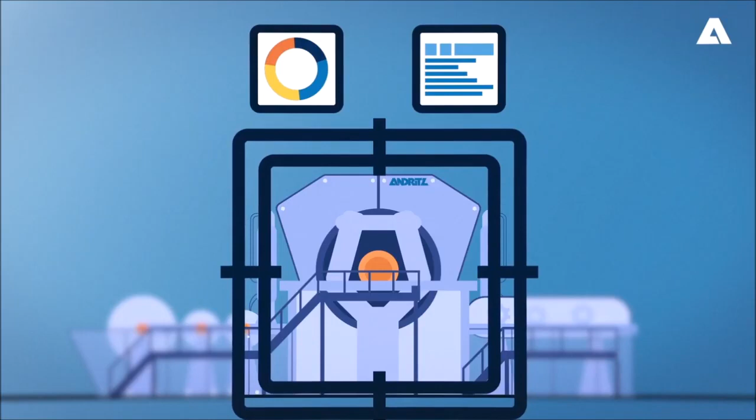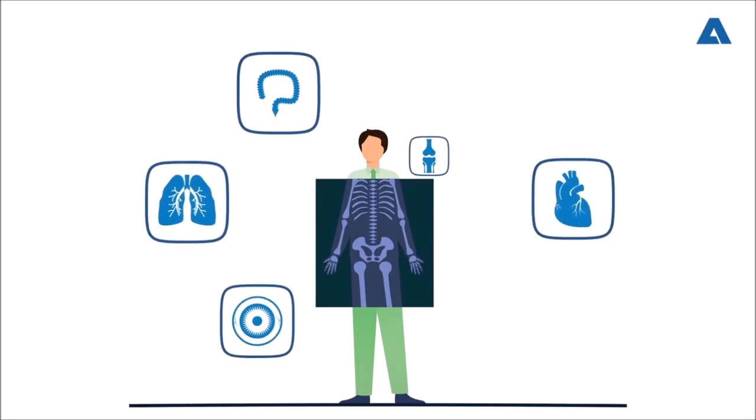Traditionally, the asset performance management system focused only on specific and separated single assets to analyze their data, not taking into account that maybe some other areas need a higher attention due to their influence on the overall production behavior. Like each human body, a mill is a very complex system where lots of process areas with different functionalities are interconnected and perform at their best together once they are synchronized properly. In industrial mills, many separated systems are working traditionally in parallel with a clear focus only on their respective assets.

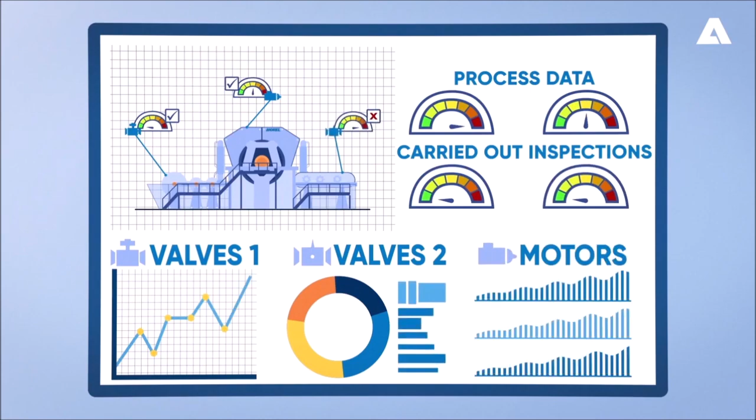Metris risk-based management has an integrated mill-wide approach considering condition monitoring of all critical assets, calculation of individual production risks, supervising maintenance activities, process conditions of the running assets, in order to calculate which assets have the most critical impact to the overall mill availability. The Metris risk-based management app calculates and displays all potential risk impacts in one graphical mill-wide overview to guide the production and maintenance managers to prevent unnecessary and expensive business losses.

In addition, the supervision of the control loops, reflecting the mechanical behavior, has an impact on the overall mechanical risk calculation. Like bacteria and viruses could invade any time and anywhere in the human body, it is necessary to analyze and prevent the hazardous potential as best as possible. A well-functioning immune system is in any case a basis to proactively react to unforeseen attacks in order to avoid unplanned shutdowns causing huge losses.

In addition to standard hardware-related risks, maintenance and inspection work, also the cybersecurity risk levels are taken into consideration. The Metris risk-based management app integrates the cyber risk potential of unsecured automation assets while also showing possible ways to fix it. The availability of the vulnerability factor for each automation asset is the basic information for the calculation of the overall cybersecurity risk factor.

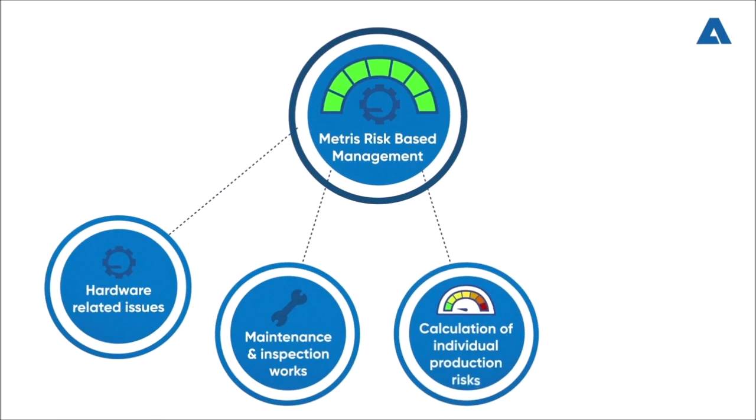Metris risk-based management focuses on a mill-wide risk level based on hardware-related issues, maintenance and inspection works, calculation of individual production risks, cybersecurity risks. It's a comprehensive app that gives a detailed representation of each asset, focusing on high-risk assets and therefore avoiding unplanned shutdowns. Metris risk-based management secures your overall asset health, the same way as an all-in-one doctor, which has ultimate knowledge about each cell and functionality in human bodies.

So, welcome back. I think that was quite a good first impression of how this application, risk-based management, actually works. I would like to go again a little bit into the details, just what is the typical situation in paper mills. So typically there are these different data silos. There is process data, maybe even stored in a data historian. There is the maintenance management software, the CMMS system, which is also a data silo, and then maybe some scattered single applications, a condition monitoring system, and so on.

So with our approach, with Metris risk-based management, we are actually combining those data silos and have all the relevant data available in one application. And what we are doing is that we assign a risk factor on an asset level based on the criticality and risk to operations. So what is the benefit? Of course, on the one hand, this secures highest asset availability.

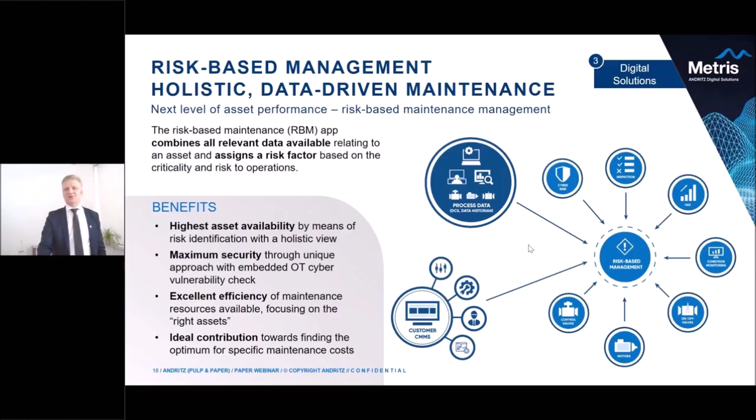And that's in the end an ideal contribution in order to achieve the lowest specific maintenance costs, but still achieving the highest possible availability in order to have, I would say, the best possible balance sheet in your mill. So two cases in order to see what we could achieve with those kinds of installations.

So the scope for both these confidential cases was that we established the risk-based management application together with Metris wireless vibration sensors. In the first case, we could achieve savings of 100,000 euros just because of the elimination of various conveyor issues. In the second case, which I think is pretty impressive, the customer could avoid 1.4 million within 9 months in terms of costs for loss of production and maintenance. And this gives an impressive ROI of close to 3 over the 9 months.

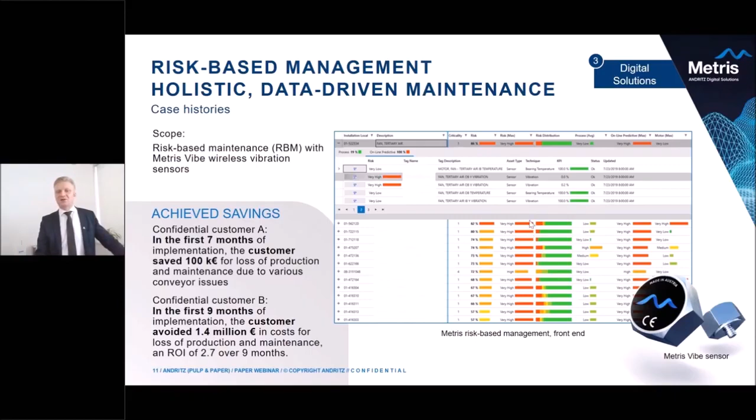So you see here the front end of our application. These are the risk factors here. And based on that, you can make the deep dive and take a look at which risk out of these different data silos is relevant. In that case, it's related to a vibration sensor, but also the percentage of cyber risks, of the CMMS, of open workflows, and so on. And also, of course, the data from the DCS itself is reflected in all those calculations here. And you can make a simple deep dive into what is actually contributing to the high risk factor.

So coming a little bit to the topic of remote commissioning, but let's first start a little bit with the history of our performance centers. The good thing for ANDRITZ is that we were really well prepared for this current difficult situation. So already before the pandemic, we had established several performance centers. We now have 15 performance centers globally distributed, which is enabling us to have real-time communication with the latest online and AR tools to capture the overall on-site situation. We also, and that's again important, have fast and protected collaboration. So all of those connections are really proven and safe in terms of cyber risks.

We can then guide with these remote technologies either mill operators or ANDRITZ personnel on site, and this is in a way the prerequisite of startup services and remote startup commissioning. So what we can say is that remote commissioning is reality today, and this is made possible with all the technologies that are available in the market. We built in features as well in order to ensure the excellent ANDRITZ quality, and also things like factory testing.

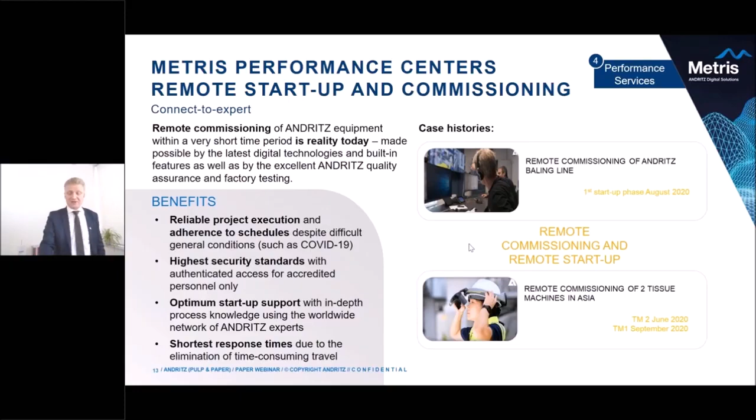Then COVID came. One month later, he was sitting in the performance center actually executing the first shoe press remote commissioning, and he was so impressed by the technology that he went back home to the site where he is located, and he said to the managing director that he should immediately ask for investment to establish one of those performance centers at his site, because that makes life so easy and so efficient. Just a true internal story.

So coming to our latest baby, which we just released some weeks ago, we have developed a soft sensor builder, which we call the Metris Digital Twin app. So that's a really, really cool thing. This new intuitive Metris Digital Twin app allows the configuration of soft sensors in just 4 easy steps. And I have to tell one story out of my practical experience. So I also worked in a paper mill for 10 years.

And already, I think it was roughly 12, 13 years ago, we tried to work with the first soft sensors at that time. And it took us, I think, in total some months actually in order to develop these soft sensors. And now with this digital twin app, it's possible to do that just in a few minutes.

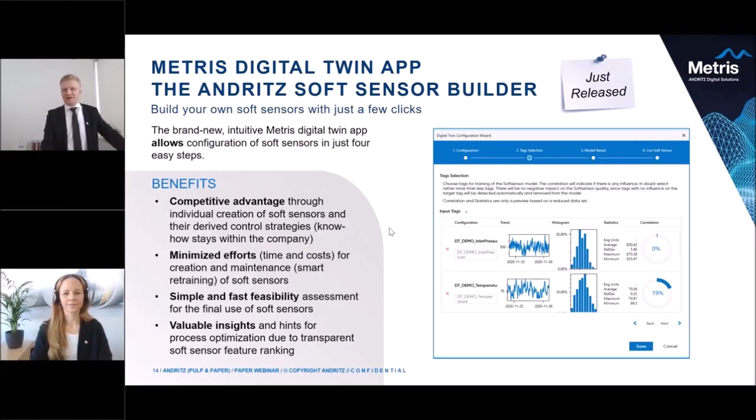So what you're getting is a competitive advantage, because if you want to keep your know-how and not use our comprehensive advanced process control library, you can use our soft sensor builder. The know-how stays within your company, and you can also then make your own control strategies out of that. As mentioned, the minimized efforts for the creation and the maintenance, and also a simple and fast feasibility assessment.

So how accurate is actually the soft sensor? Is it really suitable? Can I use it later on for a control? And we have a feature ranking in this soft sensor, which can give you valuable insights and hints for process optimization due to the transparent soft sensor feature ranking. So that was